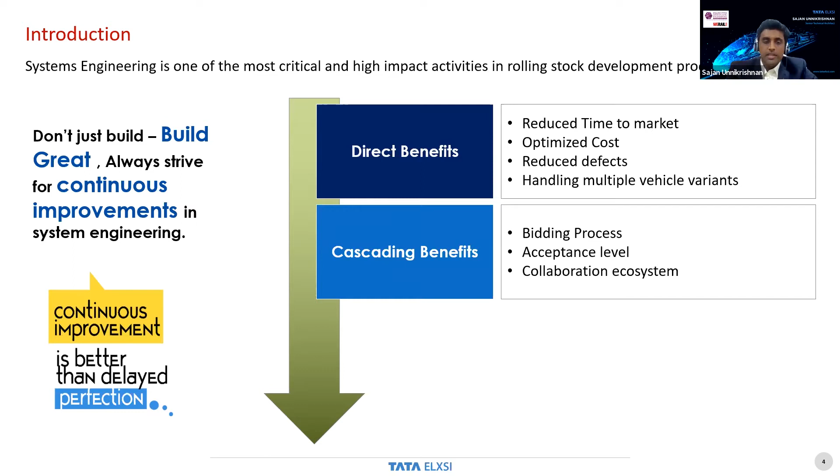And the cascading benefits are you are more confident with the bidding process, the acceptance level of the product is higher, and overall there's a more collaborative ecosystem between the three main parties, that is rail operators, rolling stock manufacturers, and the tier one suppliers. Now the question that will be arising in your mind is, will MBSE achieve all these benefits? And the answer is yes. I will try to give you an encapsulated view of how all this can be achieved through MBSE.

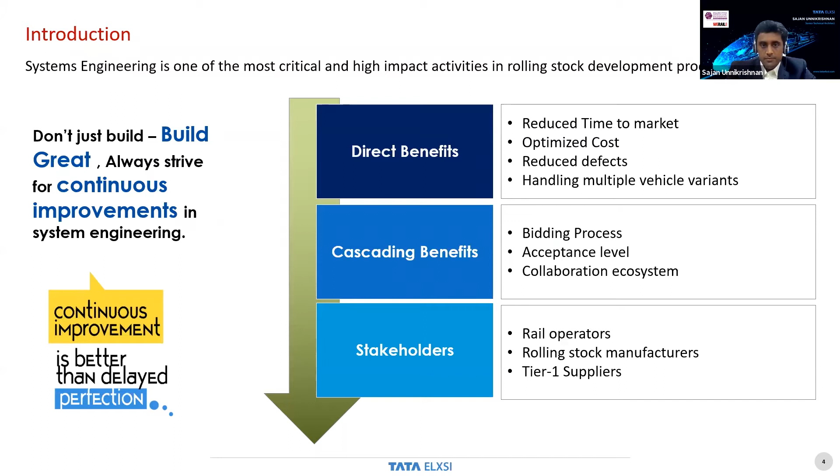So in the previous slide, you saw benefits that business would like to see. However, from a system engineering practitioner's point of view, you would resonate more with the day-to-day challenges that are faced. Let us discuss some of the challenges. I know there are so many challenges that can be tackled by improvement of the system engineering process, but let's prioritize and pick up three categories. So the first one listed here is issues being unearthed late in the life cycle. So how late could it be? Say, as late as identifying issues in the stages or during on-train testing.

Now failure at this kind of a stage is actually going to affect the deadline. It's going to cause penalties. Why does this happen? It happens because either the requirements are incomplete or inconsistent, at the design level the interfaces have gaps or are not correct, or simply because there are a lot of complex interdependencies between the systems which are not well understood at an early stage.

The second issue that I would like to discuss today is building platforms ground up. See, there's a methodology called product line engineering or product platform based engineering, where maximum reuse is done from a platform perspective. So for every project, just a change is done. I'm sure all of you might have a product line engineering based philosophy already, but is the reuse as effective as it should be? Reuse is only possible if there's a proper process to enable reuse. Now, there should be a process where you can pick and choose elements for reuse. And that's where MBSE comes in.

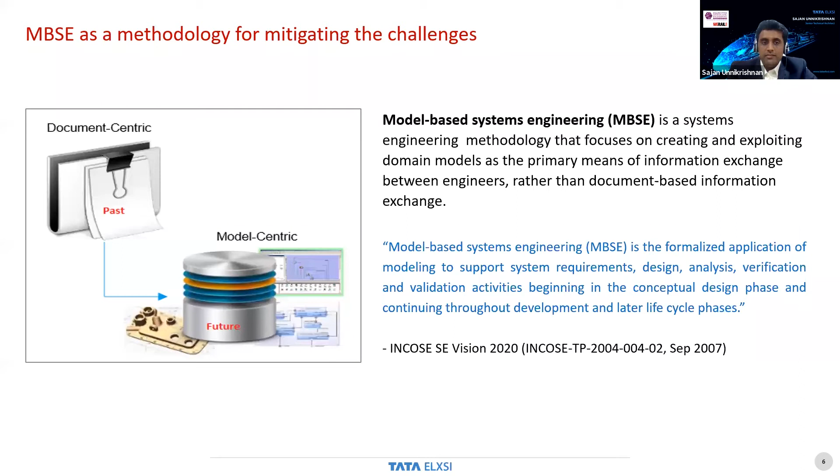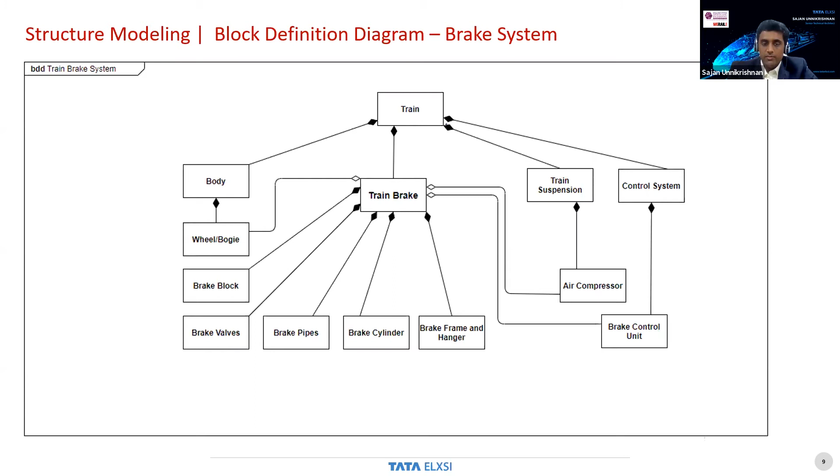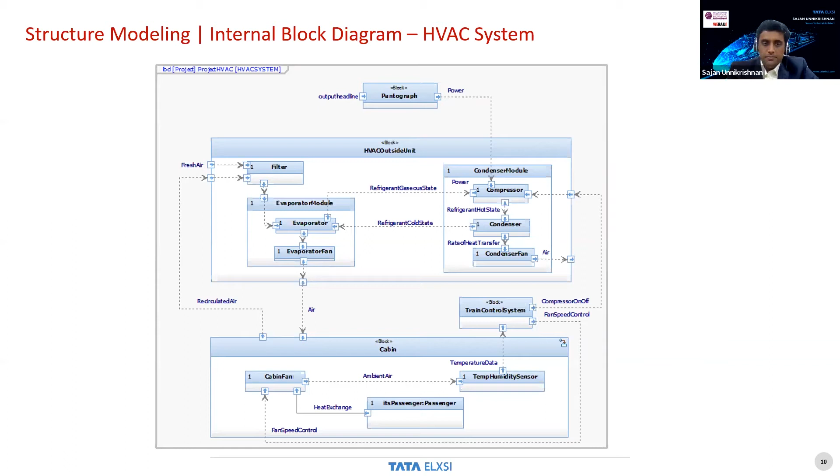When you traditionally write requirements, you tend to think in one flow, that is the positive or sunny day scenarios. But when you are using a diagram like an activity diagram with a decision box, at every stage you are thinking of a decision. What happens if that happens? What happens if this doesn't happen, and so on. So both the sunny day as well as rainy day scenarios are well captured in a diagram like an activity diagram.

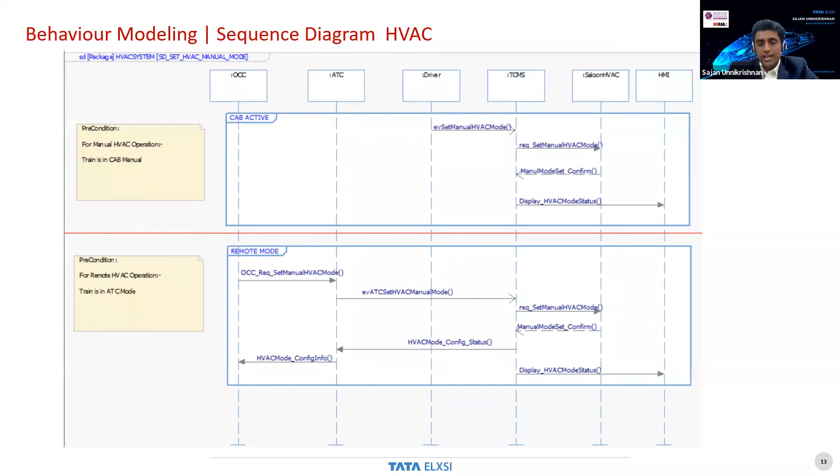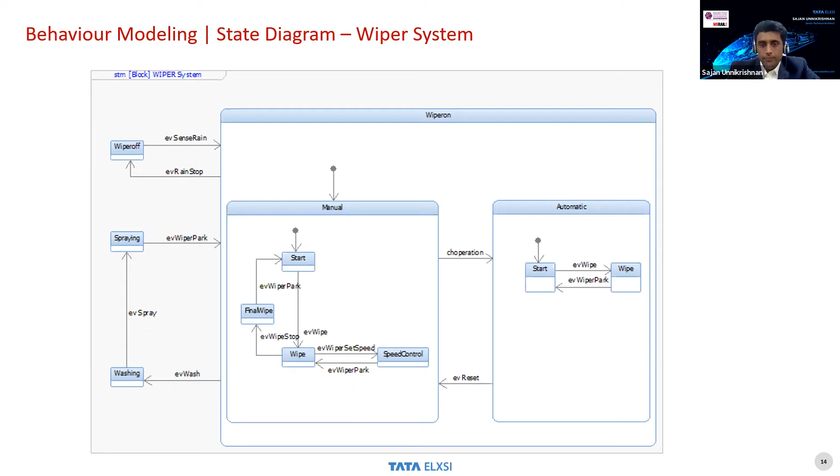So with this, I would switch to the next topic. You got a flavor of a SysML diagram, the structure and behavior. If you choose a different modeling language, you just need to see that these elements are there. Now I'll walk you through a video that shows that these diagrams are not only interlinked, but we are also going to animate them. That means these diagrams can be made dynamic.

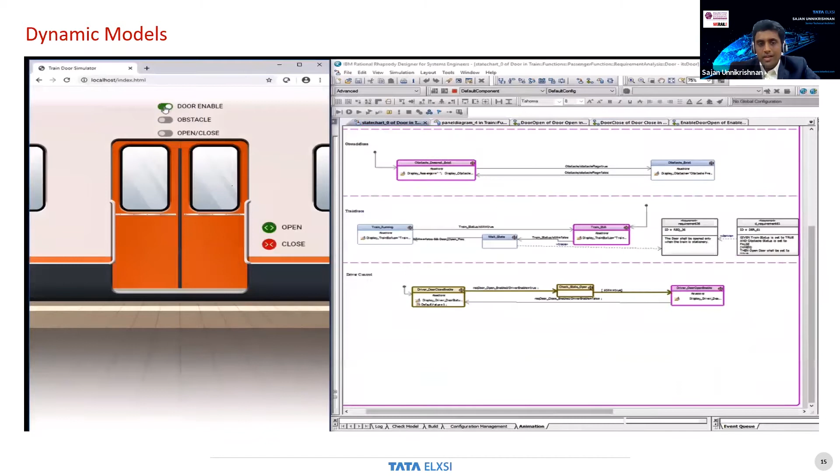So what you see in the video now, on the right side, is a state diagram, and what you see on the left is the train door operation. There are various options that the driver has, on the top of the door, where he can enable or disable the door or open or close it himself. There's an option to set the obstacle as well. On the right, you have options that a passenger chooses. And with various states being played out on the right, you have seen a more intuitive visualization of it.

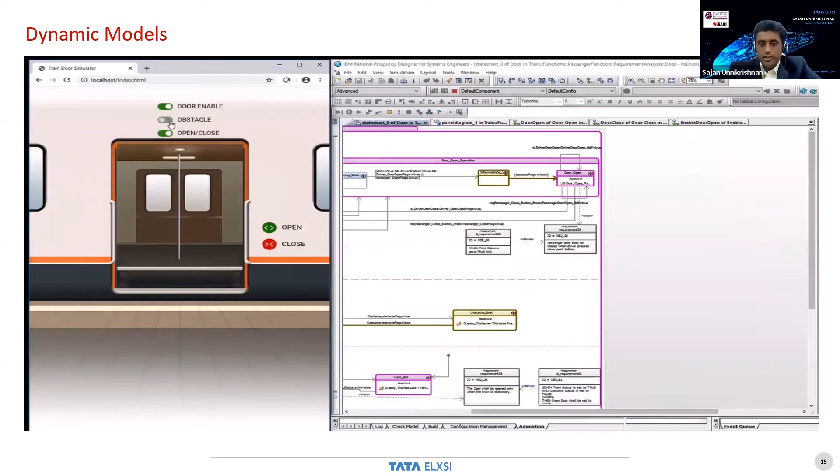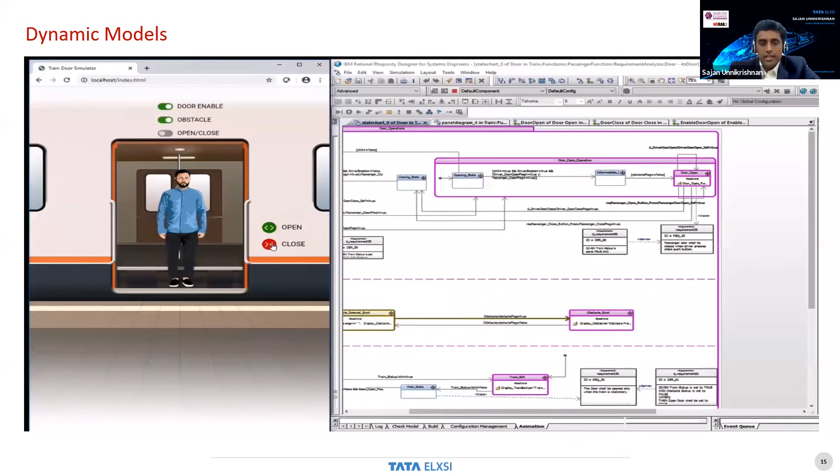So what it means is that the modeling is not just for the engineers who are very proficient in SysML. You can actually use it for visualization, and it could be a method in which OEMs and operators can sit together and agree on a feature. So this is like a virtual operation modeling.

The second point I would like to show you is that in these diagrams there's no logic on the visualization side. The entire logic is from the right side, that is from the state diagram. So if tomorrow there's a change in requirement that you need to do, you can click the state and make a change. You not only make the change, but immediately you are able to make an impact analysis, like what other requirements or what other behavior is going to change because of this particular change request. So a deeper impact analysis is enabled through such a modeling method.

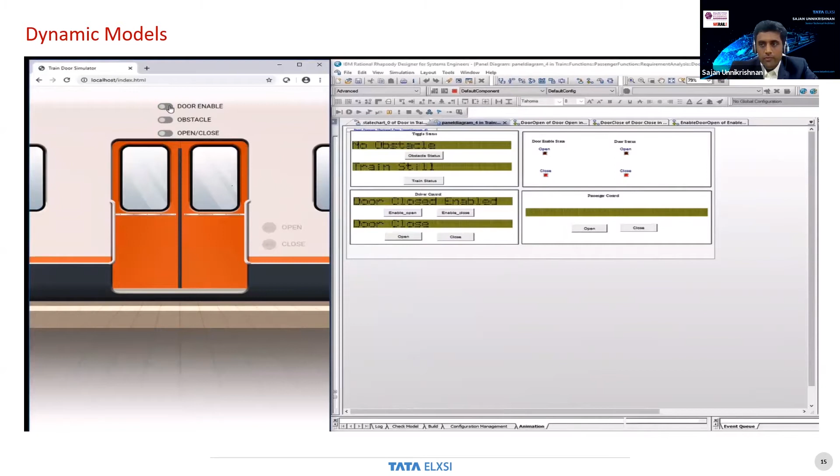Okay. Next, I'd like to take you through the idea of connecting this. So I mentioned that these diagrams all have to be connected. You have to animate and you have to make it dynamic and so on. So that's the emphasis. But how do I start? Should I start the behavior modeling first, or should I start the structural modeling first? It's like a chicken and egg problem.

The idea is, if you are very well aware of the system, you can probably go with structural modeling. You know what the building blocks are, and you can start modeling those straight away. But on the other hand, if you are very new to a system, it's better to understand the system through a use case or an activity diagram, which is an early behavior modeling method.

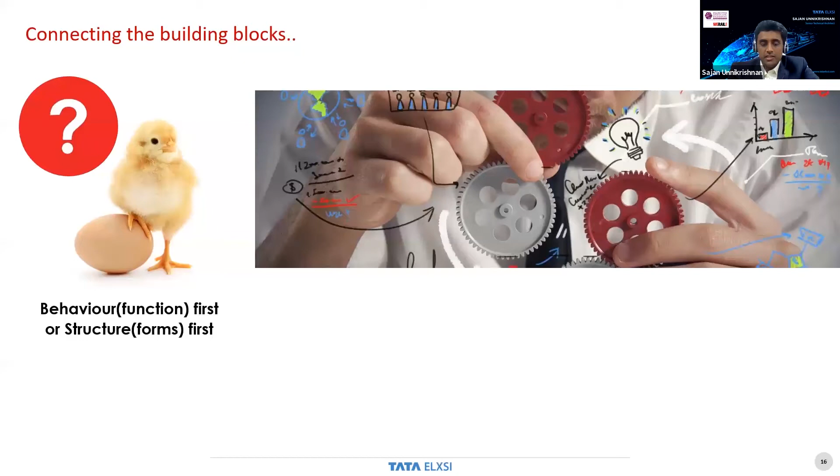Now, the focus should be to create a modeling strategy where the structure, behavior, and requirements are such that they enable seamless impact analysis. The other point is, how do we integrate models? So I have a model for, say, doors, I have a model for HVAC, I have a model for TCMS, I have a model for brake, and so on. Or within this, I have some models. How do we integrate the model? So integration strategy is also very important in creating an MBSE approach.

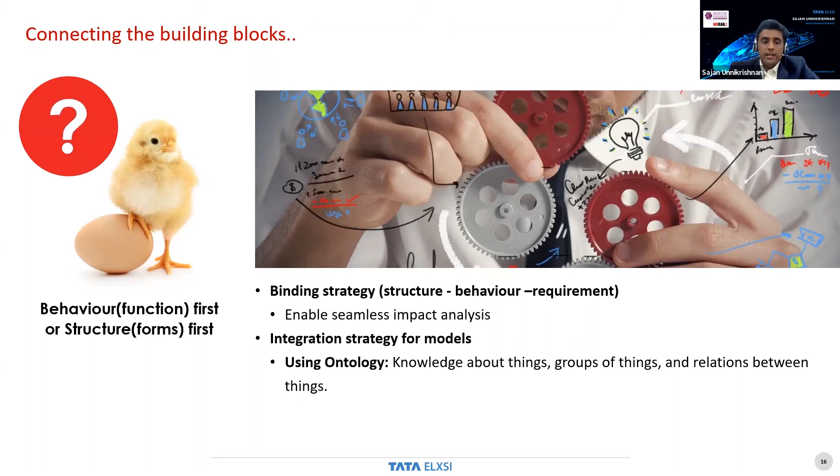Some techniques I would like to share with you today: one is ontology-based methods. Ontology is like having the knowledge of things and the relationships between things. We can also take the relationships from the lexical language and create an integration strategy. And it also requires deep system thinking to be able to create the right integration strategy. You need to connect the parts to the whole. That's the idea of system thinking.

Overall, meta modeling should be done before we start the modeling. So what is a meta model? It's a model defining the modeling process, a model about the modeling process. So I would suggest that you should all follow meta modeling before getting into the actual modeling activity.

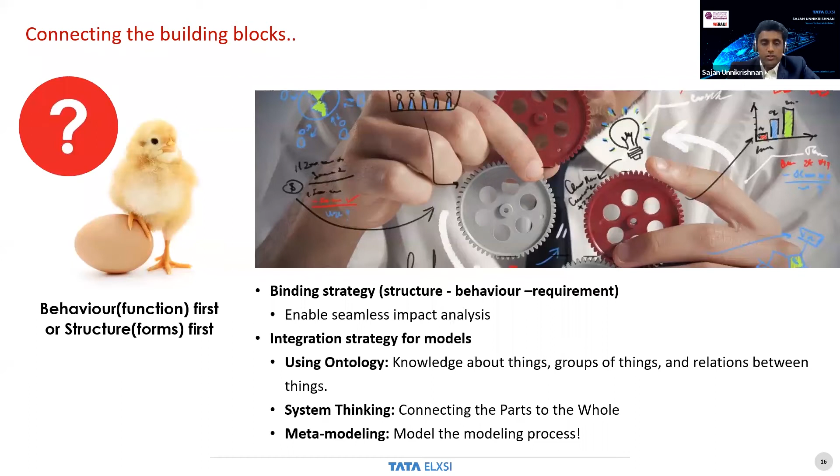So here is an example approach that we have been doing. There are 3 layers: operational requirement modeling, functional modeling, and subsystem modeling. At the operational modeling level, stakeholder needs are captured. All activities and operational modes are captured, active surroundings are captured. And we'll also do the virtual operation that you saw in the video some time back.

To give an example, suppose the customer has mentioned that ASDO functionality is required in the train, such that units shall be fitted with ASDO so that only doors within the platform length are permitted to open. Now, operational modeling will ensure that the ASDO pattern is captured correctly, the driver pattern is captured correctly, all the nuances of, say, when the pattern has to be cleared, all the alternate possibilities, everything is captured very well.

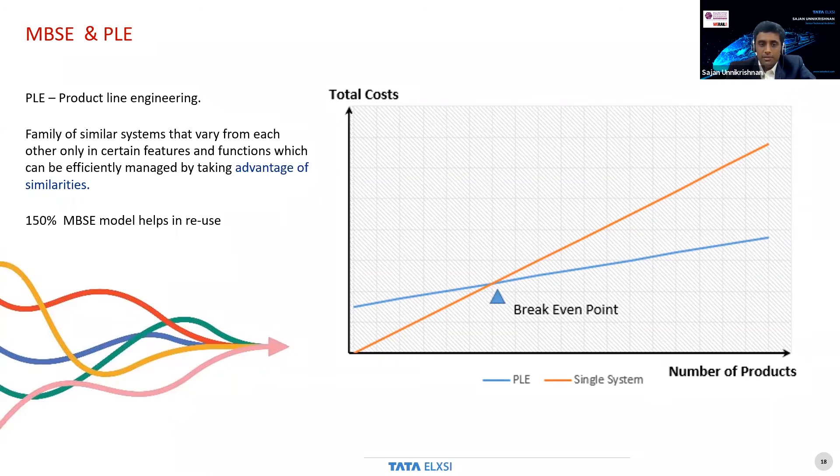Next topic is on traceability, which is also something that everybody is interested in, because it governs the quality. Okay. So what normally everybody does is create passive documents saying that A relates to B, B relates to C through a traceability document. The idea should be the traceability should be active or inherent. So as you go on decomposing, the traceability should appear on its own. That's when you can do reliable impact analysis.

And just weak links is not good. Links should be typed. So they're typed by behavior, like satisfy relationship or derive relationship or allocate, and there are many more, but there should be typed traceability.

Now, the interesting thing is when you talk about traceability and you have got so many layers, it's very much possible that each department or each layer is modeled through a different tool. Then the challenge of tool integration comes in. So for tool integration, there are methods. It's not something that is not solvable. There are a lot of methods for that.

Say there's one consortium called OSLC, which is an open community for system engineering tools, and they provide a REST API based specification, which system engineering tool providers can implement, allowing integration of tools. The other way of integration is XML metadata interchange. So it's an export. You can export, say, information as XML data. Also, if you want to do simulation in parallel between two tools, you can use concepts like functional mockup interface.